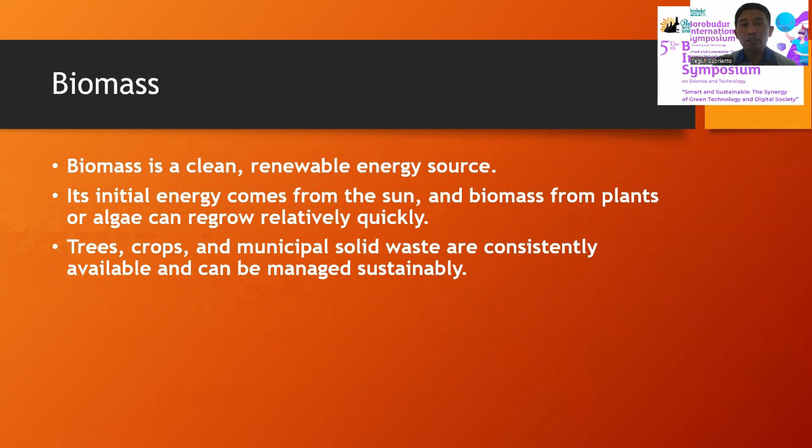This kind of crop, tree, and municipal solid waste, or crop waste, is very abundant in the rural areas of Indonesia.

Now we're talking about electricity from biomass. Biomass can be converted to electricity by using gasification. This is how biomass is converted to electricity through a turbine, and a generator from the turbine.

It can also be converted to electricity through gasification. This is the gasification reactor, which produces synthetic gas, and synthetic gas can fuel internal combustion engines.

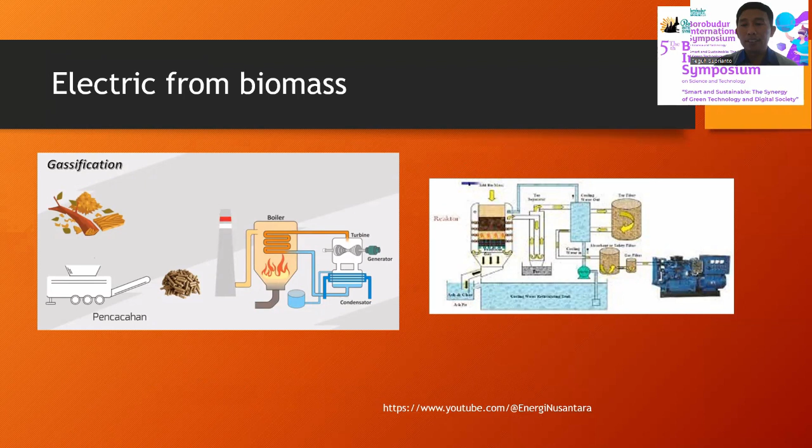Also, the utilization of biomass can be done using anaerobic digestion, and waste can be converted in a process of anaerobic digestion or fermentation, which can produce gas.

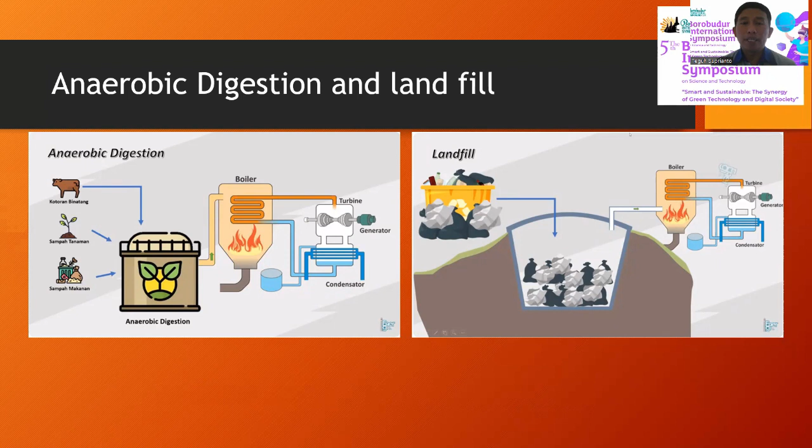The gas can be burned in a boiler, so the boiler heats the water to produce steam, and the steam runs the turbine, which generates electricity.

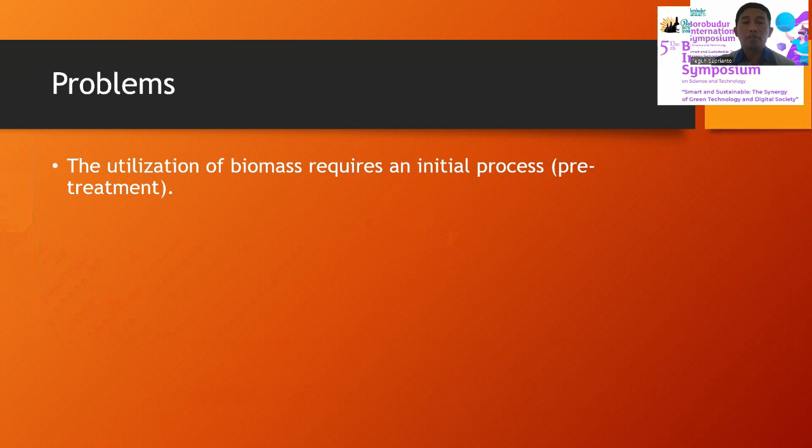The problems with using biomass for gasification are that the utilization of biomass requires an initial process, or pre-treatment, and the use of a steam engine involves a high investment. It is also challenging for internal combustion engines due to the varied composition of biogas.

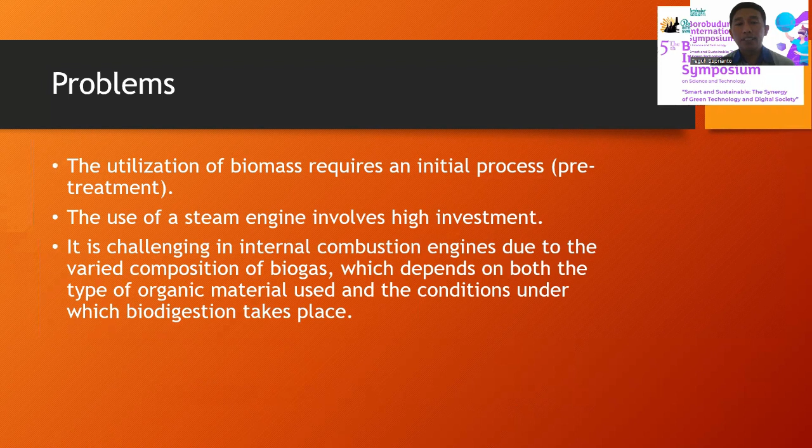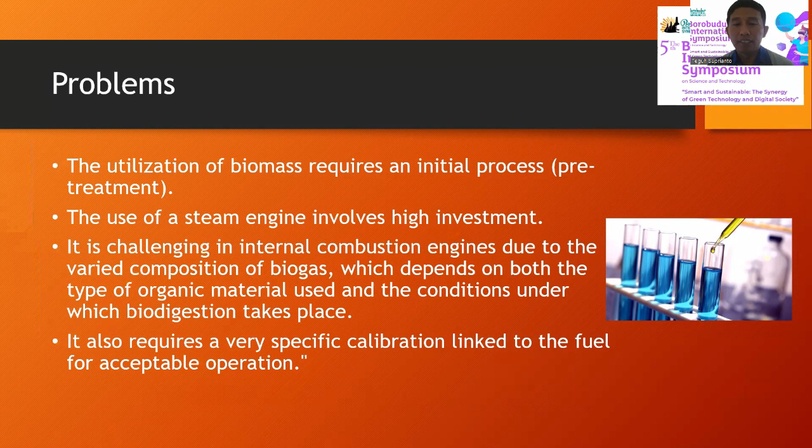This depends on both the type of organic material used and the conditions under which biodigestion takes place. The result from gasification also requires very specific calibration of the fuel for acceptable operation.

At this time, I will explain the potential of the Stirling engine. What is the Stirling engine? The Stirling engine is an engine that uses power from the hot side.

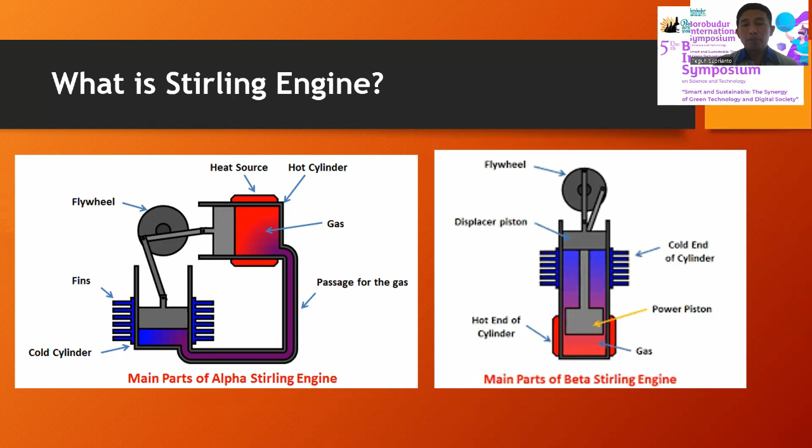It produces pressure in the engine, and the pressure can turn the flywheel, turning the engine so it can produce rotation.

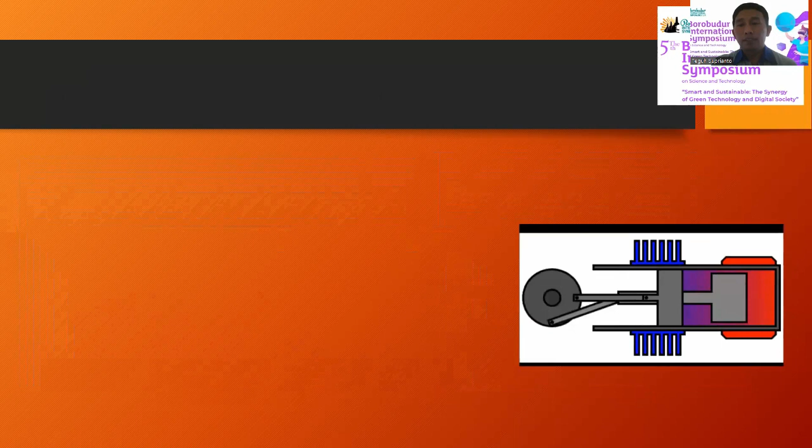This is how the Stirling engine works. The Stirling engine works by using pistons inside the engine.

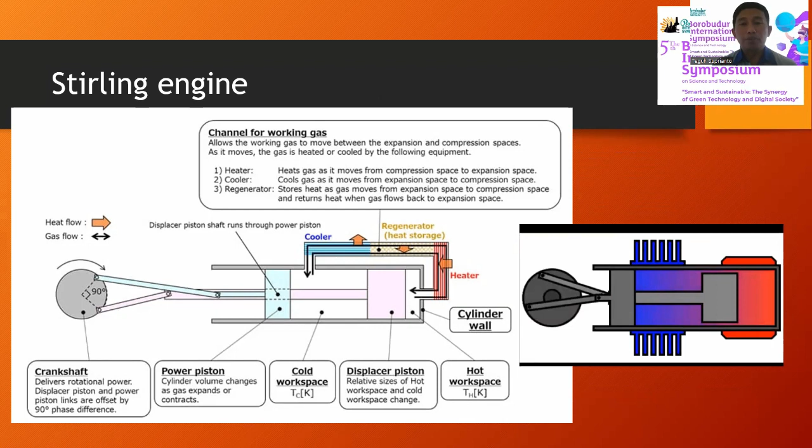There are two pistons: the displacer piston and the power piston, and the expansion cylinder is heated by the hot source.

So the hot source expands the gas in the expansion cylinder, and the gas produces pressure. This pressure works on the pistons, and the piston moves backward, rotating the flywheel in the engine.

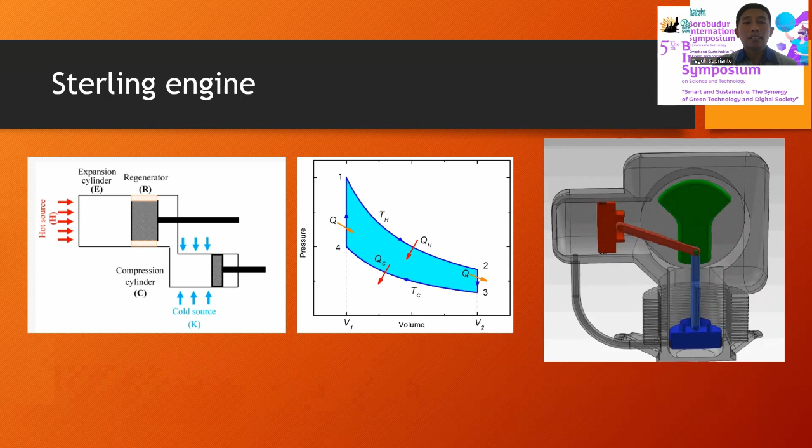In comparison to the internal combustion engine, the Stirling engine offers high efficiency and less exhaust emissions. The presence of contaminants is not a limiting factor for operation, compared with the internal combustion engine, which is very sensitive to contaminants. This does not occur when using the Stirling engine.

The Stirling engine can work with different heat sources, including providing heat by burning waste, by using a gas cylinder, and many more sources.

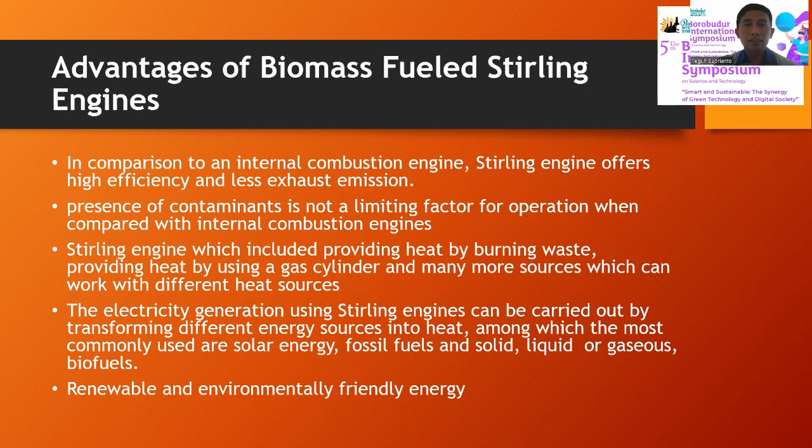So electricity generation using Stirling engines can be carried out by transforming different energy sources into heat, among which the most commonly used are solar energy, fossil fuels, and solid, liquid, or gaseous biofuels. This can make it a renewable and environmentally friendly engine for electricity generation.

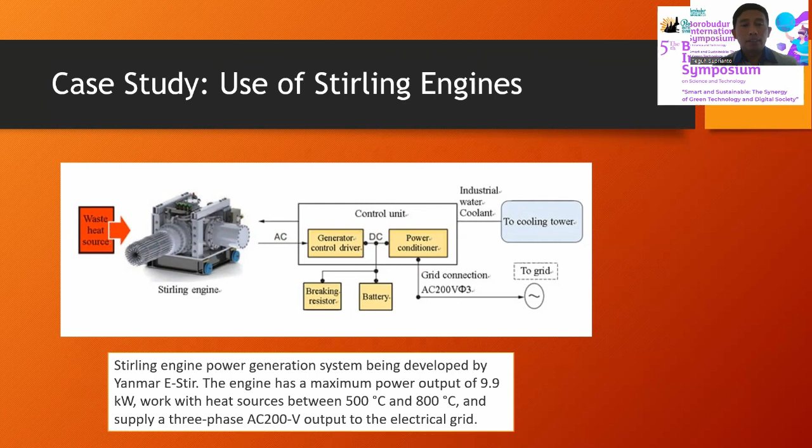This is some of the case studies that use the Stirling engine. This kind of engine is developed by Yanmar.

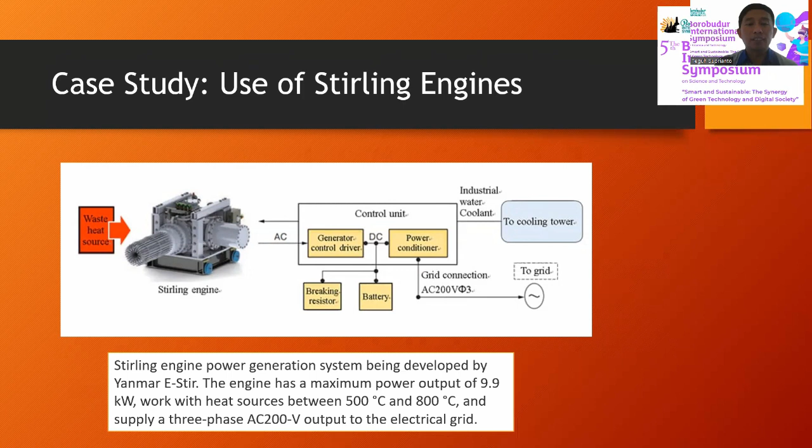The engine has a maximum power output of 9.9 kilowatts, works with a heat source between 500 and 800 degrees, and supplies a three-phase AC 200 volt output to the electrical grid.

Challenges and limitations: challenges in the implementation of Stirling engines, in comparison with traditional internal combustion engines, include high cost and unfavorable mass-to-dimension parameters, as well as limited aggregate capacity. This is different from internal combustion engines.

When we use an internal combustion engine, the engine is relatively small with a high ratio between output power and engine dimension.

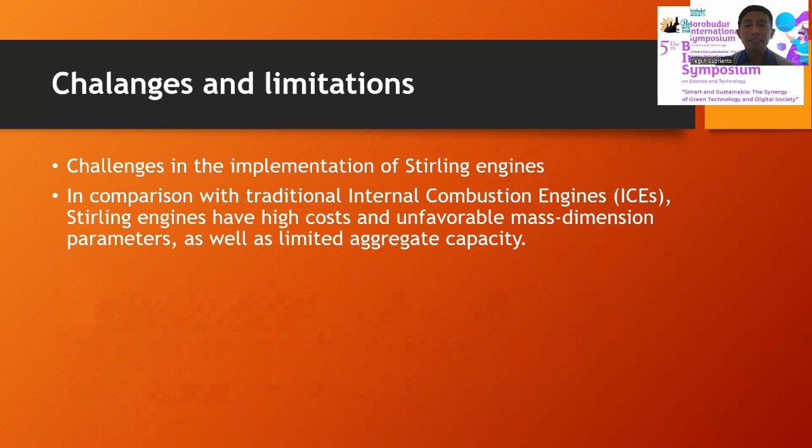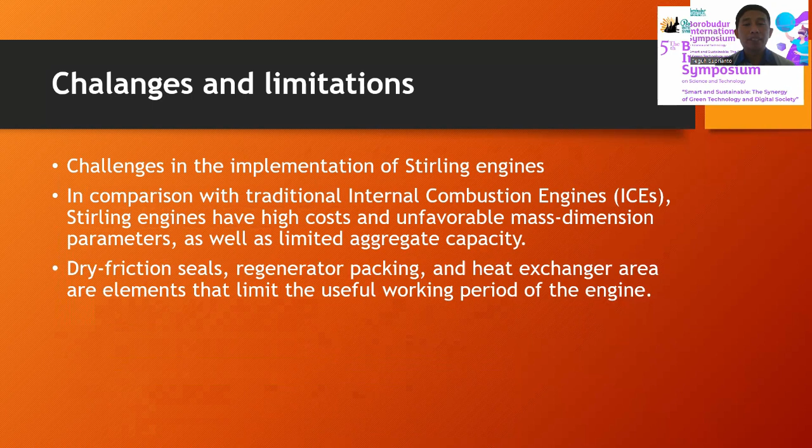Dry friction seals, regenerator packing, and heat exchangers are elements that limit the useful working period of the engine. The public's lack of familiarity with Stirling engine power plants, and the limited availability of maintenance, are additional challenges.

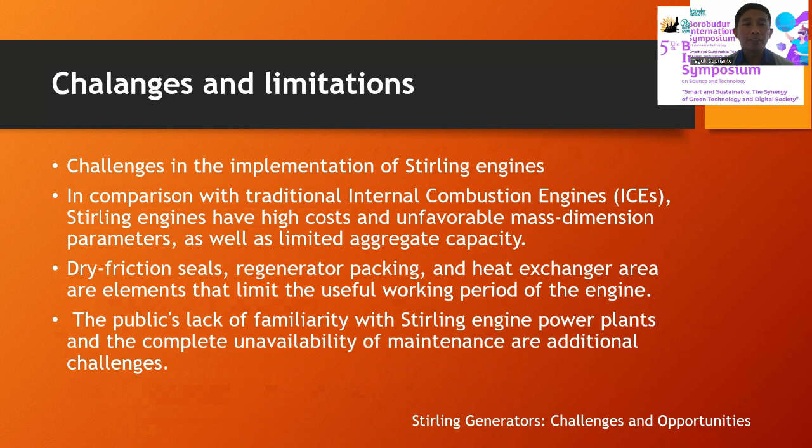So future research and additional development are crucial to producing a practical engine. This involves selecting suitable configurations, adopting a good working fluid, minimizing losses, and developing an efficient control system.